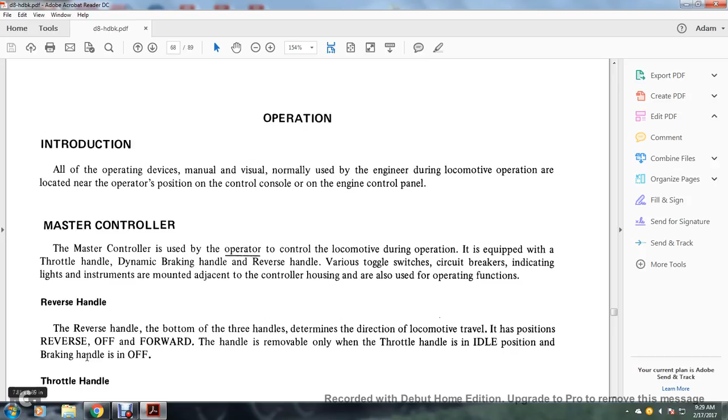The throttle handle is above the reverse handle. It has a shutdown, idle, and eight power positions or notches for full power. Shutdown position is located to the right of idle.

It's used in emergency to shut down all power on multiple unit consists, at the operating position of the control unit. Pull out axially on the throttle handle to put it in shutdown. This action shuts down the diesel engine.

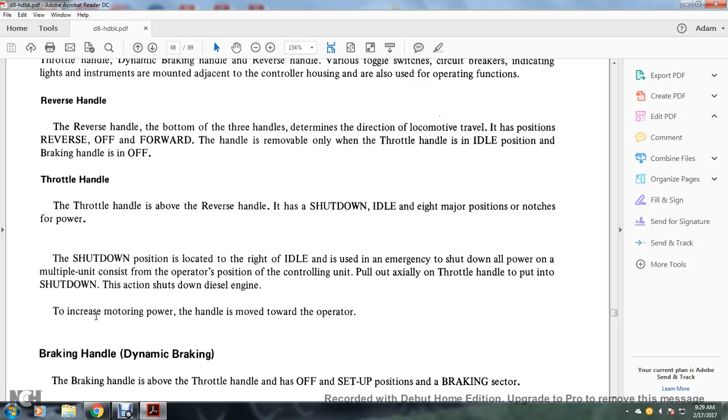To increase the motor power, the handle is moved toward the operator.

The brake handle, dynamic braking. The brake handle is above the throttle handle and has an off position, a setup position, and a braking sector. The off position, nearest the operator, deactivates dynamic braking and shuts it off. The setup position establishes the dynamic braking circuits. Movement beyond setup into the braking sector, away from the operator, increases the brake effort.

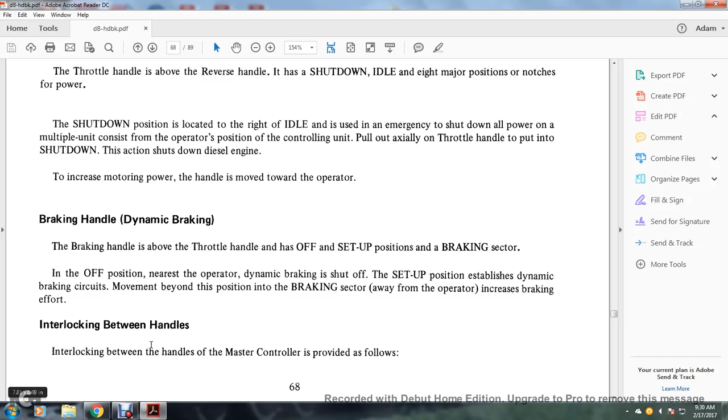Interlocking between handles. Interlocking between the handles in the master controller is provided as follows: 1. The reverse handle must be inserted before the throttle handle can be moved out of idle position for power or emergency shutdown.

2. The reverse handle can be moved to forward or reverse only with the throttle handle in idle position and the brake handle in the off position. 3. The reverse handle cannot be moved out of forward or reverse position when either the throttle handle is advanced beyond idle or the braking handle is advanced beyond off.

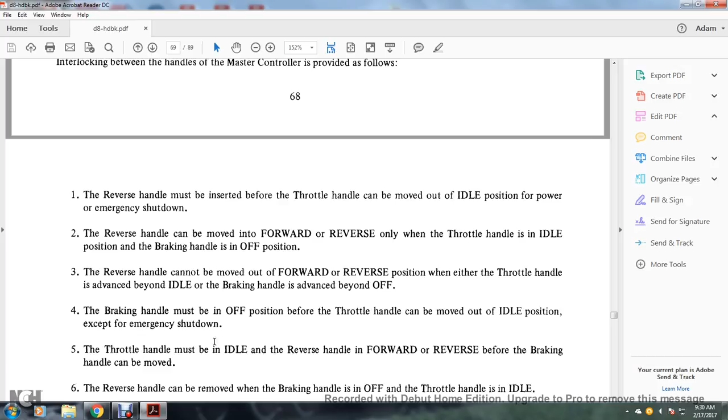The brake handle must be in the off position before the throttle handle can be moved out of idle position, except for emergency shutdown. The throttle handle must be in idle and the reverse handle in forward or reverse before the braking handle can be moved. The reverse handle can be removed when the brake handle is off and the throttle handle is in idle.

Operation. To manipulate the controller handles during locomotive operation, proceed as follows: For lead or single unit operation, handle setup: reverse handle removed, braking handle in off, and throttle handle in idle.

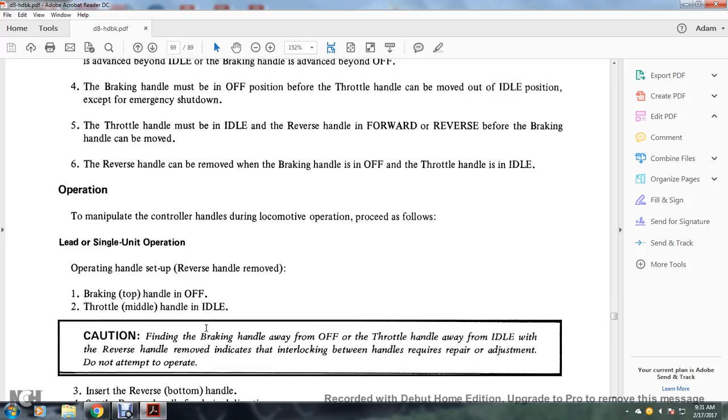Caution: if the brake handle moves away from off, or the throttle handle away from idle, while the reverse handle is removed, this indicates the interlocking between the handles requires repair or adjustment. Do not attempt to operate.

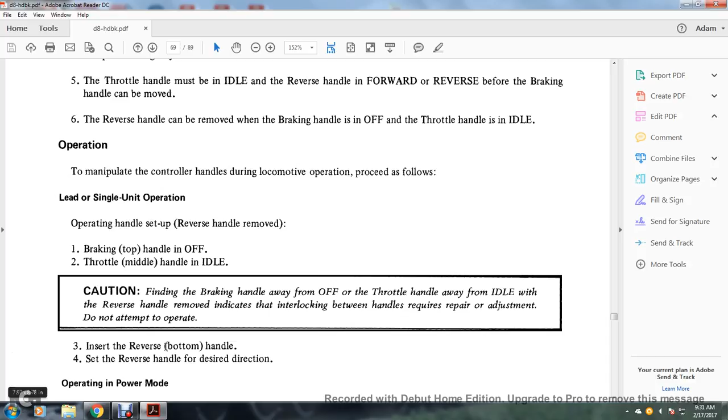3. Insert the reverse handle at the bottom. Set the reverse handle to the desired direction. Operation in power mode.

Braking handle remains off. Move the throttle to the desired notch. Operation in dynamic braking mode.

Throttle handle returned to idle. Move the brake handle to setup. Advance as desired.

Operation as a trailing unit: brake handle is off, throttle is in idle, and reverse handle is centered and removed.

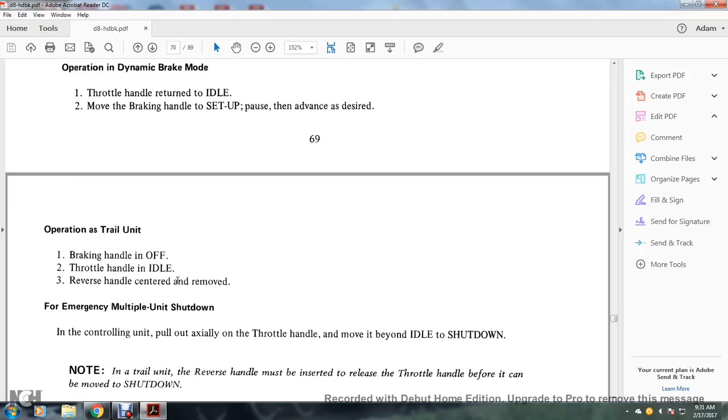For emergency multiple unit shutdown in a control unit, pull out axially on the throttle handle beyond idle to shut down. On a trailing unit, the reverse handle must be inserted to release the throttle handle before it can be moved to shutdown.

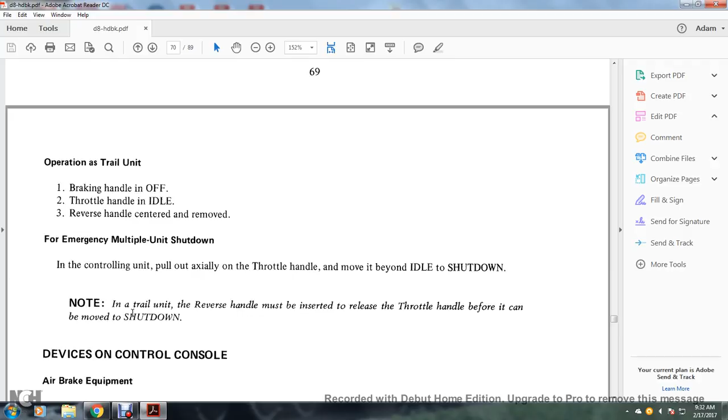Devices in the control console. The air brake equipment. The Schedule 26L equipment arranged, single station multiple unit operation, principal parts are the 26C brake valve. The valve consists of two separate pieces: the automatic brake valve and the independent brake valve.

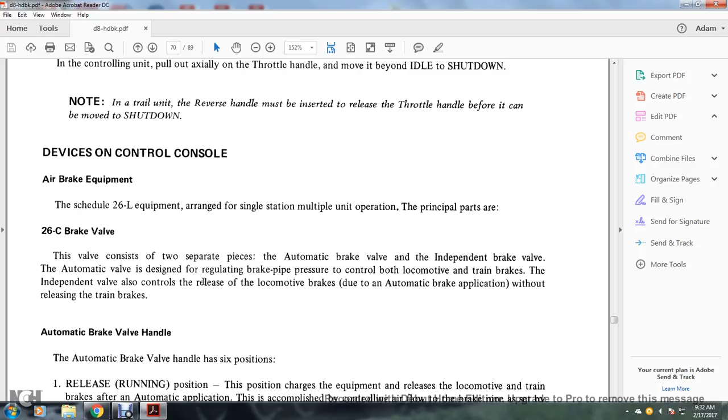The automatic valve is designed for regulating brake pipe pressure to control both the locomotive and train brakes. The independent valve also controls the release of the locomotive brakes due to an automatic brake application without releasing the train brakes. Automatic brake valve handle.

The automatic brake valve handle has six positions: release or running position. The position charges the equipment and releases the locomotive and train brakes after an automatic application.

This is accomplished by airflow through the brake pipe as set by the brake handle position, in conjunction with the regulating valve on the back of the brake stand. The release position is at the extreme left of the quadrant, and it is the normal position when the automatic brake is not in use.

Minimum reduction position. The position is located to the right of the release position, where the brake valve handle reaches the first raised portion of the quadrant. When the brake valve handle is moved to this position, the minimum service application is obtained, resulting in a 4 to 6 pound brake pipe reduction.

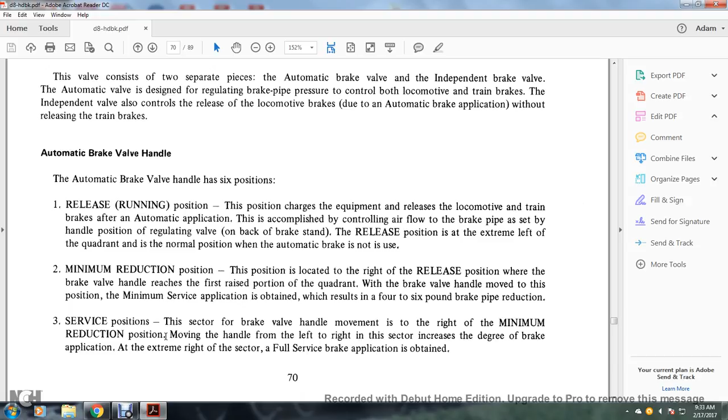Service position. The sector of the brake valve handle movement is to the right of the minimum reduction position. Moving the handle from left to right in this sector increases the degree of brake application. At the extreme right of the sector, a full service brake application is obtained.

Alright, this is your automatic brake valve positions. You have your regulating valve, the brake stand, release automatic handle, minimum reduction, service zone, full service, suppression, handle off, and emergency.

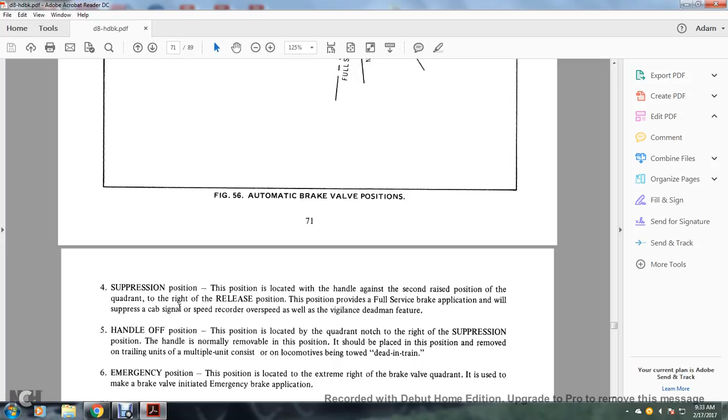This is the suppression position. The position is located with the handle against the second raised position of the quadrant, to the right of the release. This position provides a full service brake application and will suppress the cab signal, speed recorder overspeed, as well as the vigilance deadman feature.

Handle off position. The position is located with the quadrant to the right of the suppression position, and the handle is normally removable. In this position, it should be placed when removed on trailing units and multiple units consisting of locomotives being towed or a dead engine in a train.

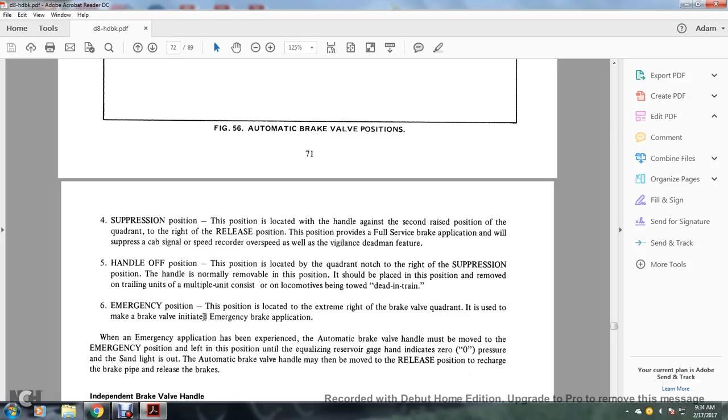Emergency position. The position is located at the extreme right of the brake valve quadrant and is used to initiate an emergency brake application. When an emergency application has been experienced, the automatic brake valve handle must be left in the emergency position until the equalizing reservoir gauge indicates zero pressure.

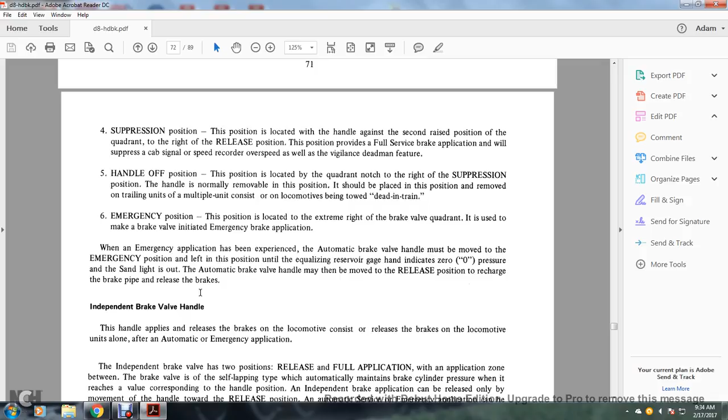Once the reservoir gauge reads zero, the automatic brake valve handle may be moved to the release position to recharge the brake pipe and release the brakes.

Independent brake valve handle. The handle applies and releases the brakes of the locomotive consist, releasing the brakes of the locomotive units alone after an automatic or emergency application. The brake valve has two positions, release and full application, with an application zone between. The brake valve is a self-lapping type that automatically maintains brake cylinder pressure in accordance with the corresponding handle position.

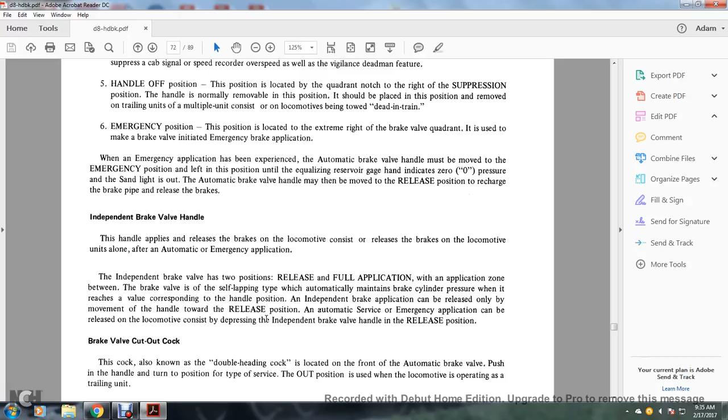The independent brake application can be released by moving the handle toward the release position. The automatic service and emergency application can be released in the locomotive consist by depressing the independent brake valve handle in the release position.

Your brake valve cutout cock. The cock, also known as the double heading cock, is located at the front of the automatic brake valve stand. Pushing in the handle will determine the position and the type of service. The OUT position is used when a locomotive is operating as a trailing unit in a multiple unit cutout cock.

The valve is located on the brake stand and enables a locomotive equipped with 26L brakes to operate with multiple locomotives having other types of brake equipment, by turning to the proper position.

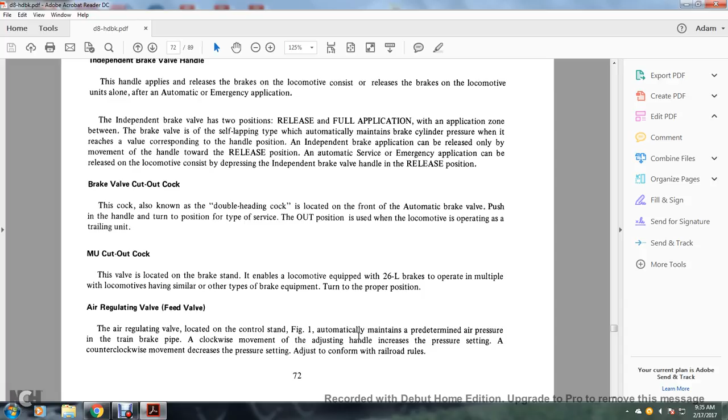Air regulating valve, the feed valve. The air regulating valve, located on the control stand, automatically maintains a predetermined air pressure for the train pipe or brake pipe. Clockwise movement of the adjusting handle increases the pressure setting, and counterclockwise movement decreases the pressure setting, conforming to railroad rules.

The horn valve. Pulling the handle toward you will sound the air horn.

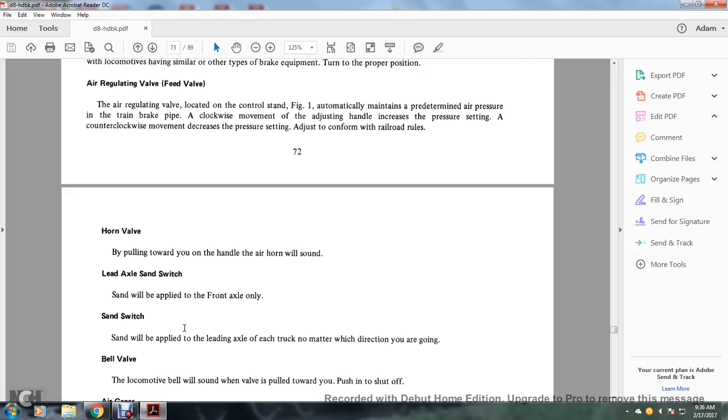Lead axle sand switch. Sand will be applied to the front axle only. The sand switch will be applied to the lead axle of each truck, no matter which direction you are traveling.

Bell valve. The locomotive bell will sound when pulled toward you, and push in to shut off.

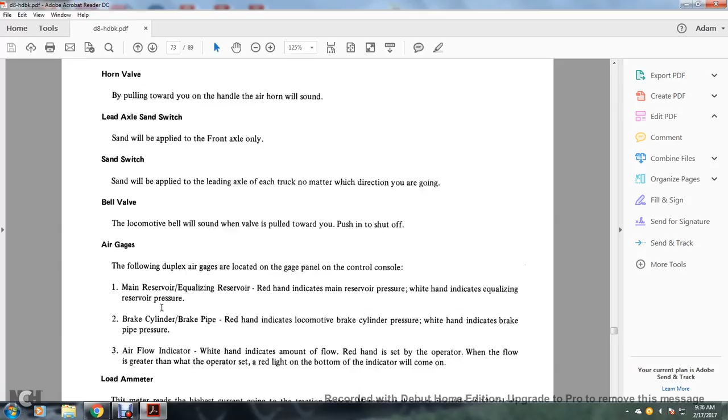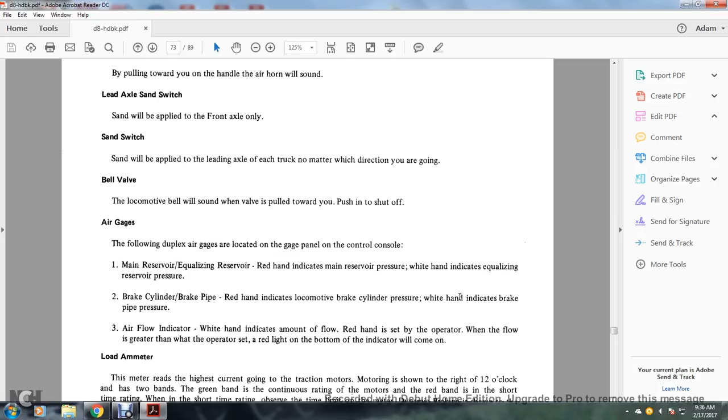Air gauges. The following duplex air gauges are located on the gauge panel of the control console. Main reservoir and equalizing reservoir: the red hand indicates main reservoir pressure, the white hand indicates equalizing reservoir pressure. Brake cylinder and brake pipe: the red hand indicates locomotive brake cylinder pressure, the white hand indicates brake pipe pressure.

Airflow indicator. The white hand indicates the amount of flow, the red hand is set by the operator. When the flow is greater than what the operator has set, the red light button at the bottom of the indicator will come on.

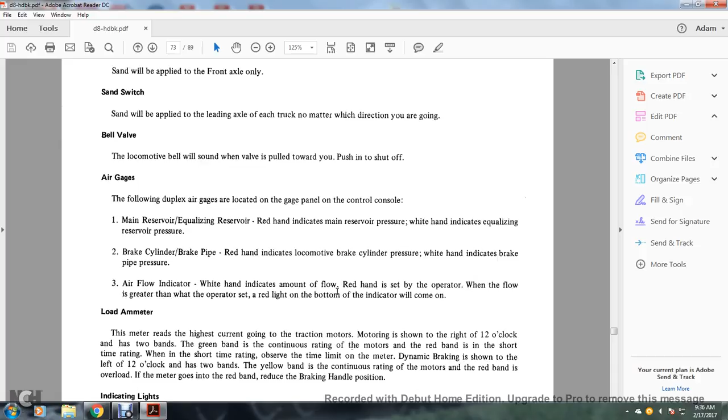The meter reads the highest current going through the traction motor. Motoring is shown to the right of 12 o'clock and has two bands. The green band is the continuous rating of the motor, and the red band is a short time rating. When in the short time rating, observe the time limit of the meter.

The dynamic braking meter is shown to the left of 12 o'clock and has two bands. The yellow band is the continuous rating of the motors, while the red band indicates overload. When the meter goes into the red band, reduce the brake handle position.

Indication lights: there are 6 indication lights on the console, arranged left to right, top to bottom. The wheel slip light indicates that the wheels on some locomotive in the consist are slipping, with a train line indication.

The PCS open light indicates the air brake has gone into the emergency position. All power should be removed from the locomotive.

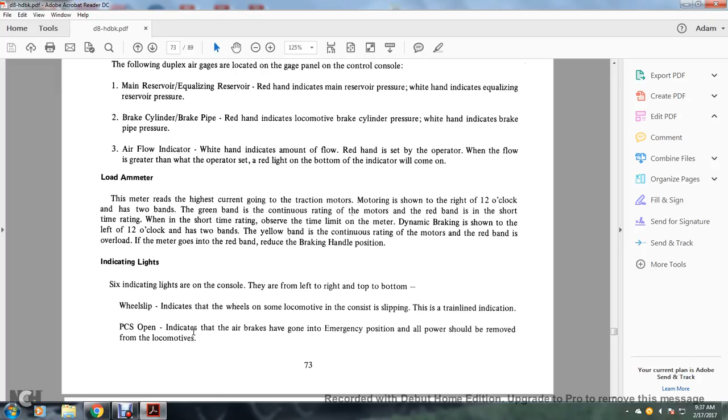The switches gauge light switch turns all lights on the operating console on. The gauge light's dimmer knob is located around the front of the console near the front window.

The step light switch turns on all four corners' step lights.

The generator field circuit breaker is in and on whenever the locomotive is powered and operating as the lead unit. The breaker may also be used to keep the main generator de-energized when it's necessary to run engine speeds higher than idle.

Engine run: the engine run breaker controls the engine speed. It must be on to control engine speed on the lead locomotive. On all other locomotives in the consist, the trail locomotive breaker is in the 'off' position.

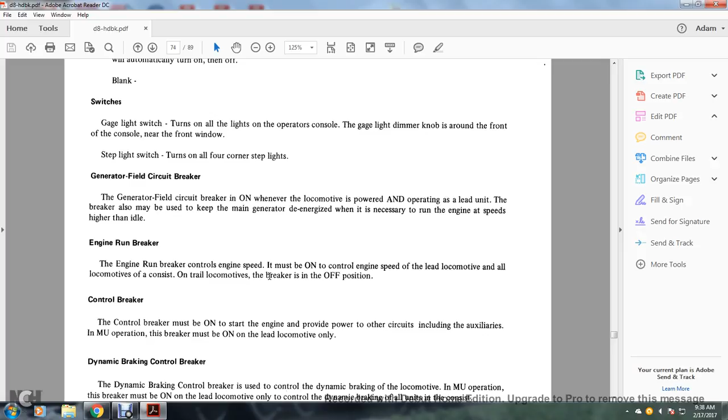Control breaker: the control breaker must be on for starting the engine, and provides power to circuits including the auxiliary multiple unit operation. For multiple unit operation, the breaker must be on at the lead locomotive only.

Dynamic braking control breaker: this breaker is used to control the dynamic brake for the locomotive. For multiple unit operation, the breaker must be on at the lead locomotive only, to control the dynamic braking of all units in the consist.

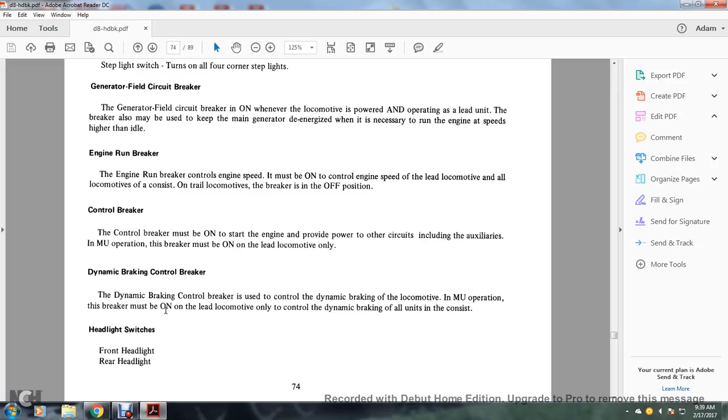Headlight switches: front headlight, rear headlight, call button. The button rings the call bell. All units in the consist follow the normal correlation between the throttle handle, brake handle, and engine speed in RPMs.

At throttle idle, engine notch 1, the engine runs at idle with readings of 445, 445, 453 RPMs. At throttle handle 2, engine notch 2: 521, 549. At throttle handle 3, engine notch 4: 704, 712. At throttle handle 4, engine notch 5: 758, 788.

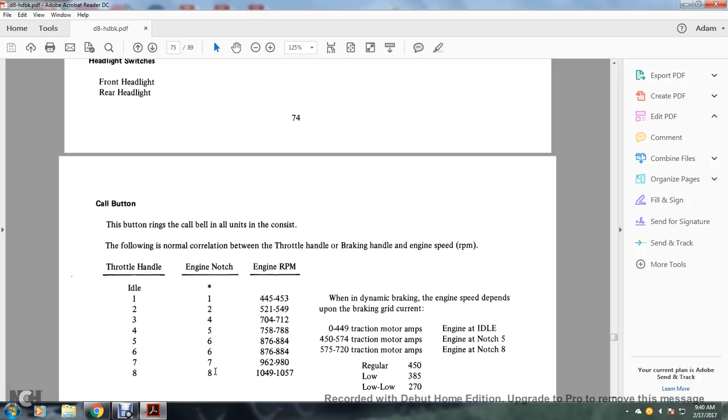At throttle handle 5, engine notch 6: 876, 884. At throttle handle 6, engine notch 6: 878, 876, 884. At throttle handle 7, engine notch 7: 962, 980. At throttle handle 8, engine notch 8: 1049, 1057.

When dynamic braking, the engine speed depends upon the braking grid current. From 0 to 449 traction motor amps, the engine is at idle. From 450 to 574 traction motor amps, the engine is at notch number 5.

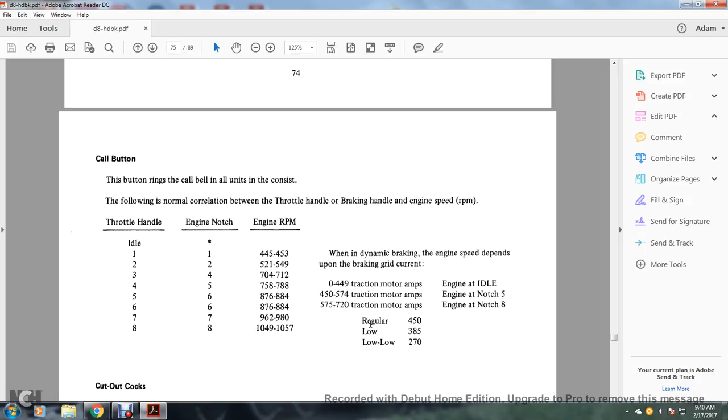From 575 to 720 traction motor amps, the engine is at notch number 8, with regular 450, low 385, low-low 270.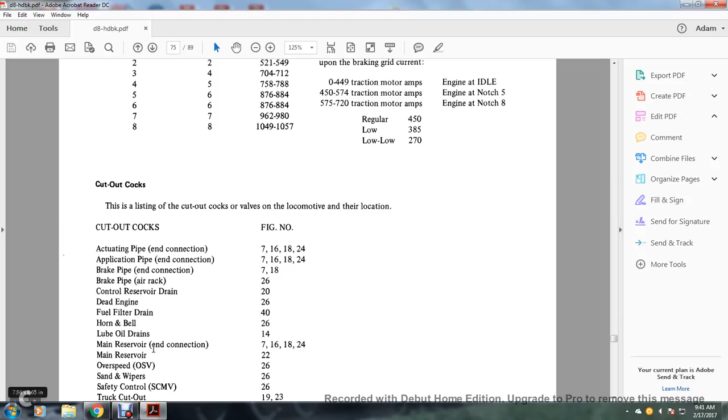Brake pipe end connection: 7 and 18. Brake pipe air rack: 26. Control reservoir drain: 20. Dead engine: 26. Fuel filter drain: 40. Horn and bell: 26. Lube oil drains: 14. Main reservoir end connection: 7, 16, 18, 24. Main reservoir: 22. Overspeed, sand and wipers, and safety control: 26. Truck cutout: 19, 23. Water drain: 42. Water sight glass shutoff: 42.

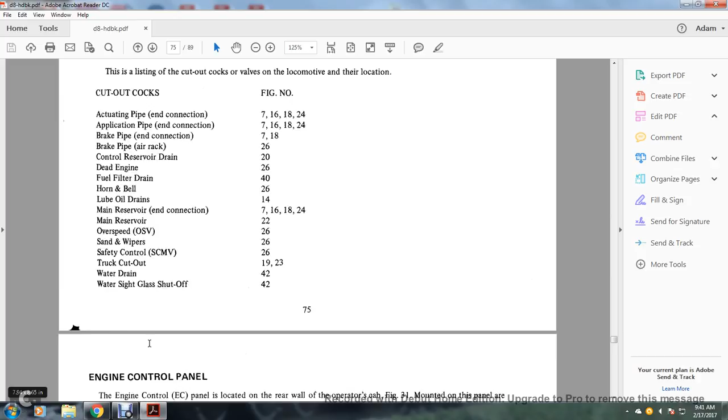The engine control panel is located on the rear wall of the operator's cab. As shown in figure 31, mounted on the panel are various circuit breakers, switches, a display panel, and other operating devices used during locomotive operation. A description of each of these devices will follow.

Circuit breakers for the engine control panel: the top row of circuit breakers is used for optional equipment. This equipment can be turned off when the unit is operating as a trail unit. From left to right, the circuit breakers correspond to their function.

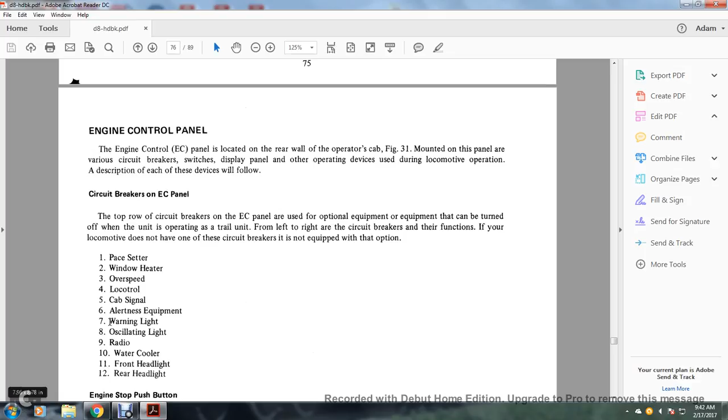If the locomotive does not have one of these circuit breakers, it is not equipped with that option: 1 pacesetter, 2 window heater, 3 overspeed, 4 Locotrol, 5 cab signal, 6 alertness equipment, 7 warning light, 8 oscillating light, 9 radio, 10 water cooler, 11 front headlight, 12 rear headlight.

Engine stop push button: the button shuts down the diesel engine of that unit only.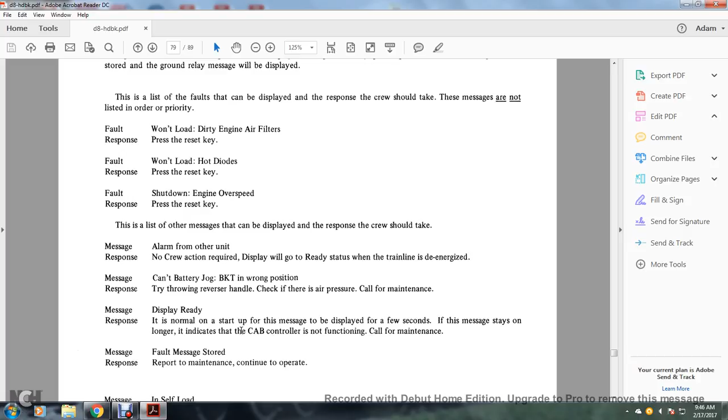Message display ready: as in normal startup, the message displays for a few seconds. If the message stays on longer, it indicates the cab controller is not functioning, call for maintenance. Message fault, message stored: report to maintenance and continue operation.

Message: if self-loaded, check to see if the self-load switch in the electrical locker in the operators cab is at the normal position. Message isolated: place the engine control panel switch in the running position.

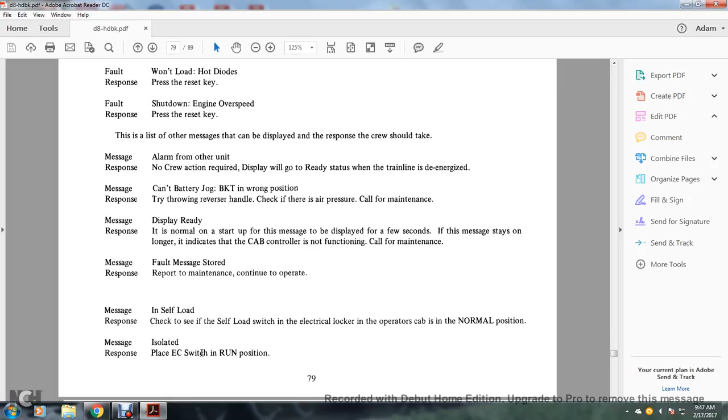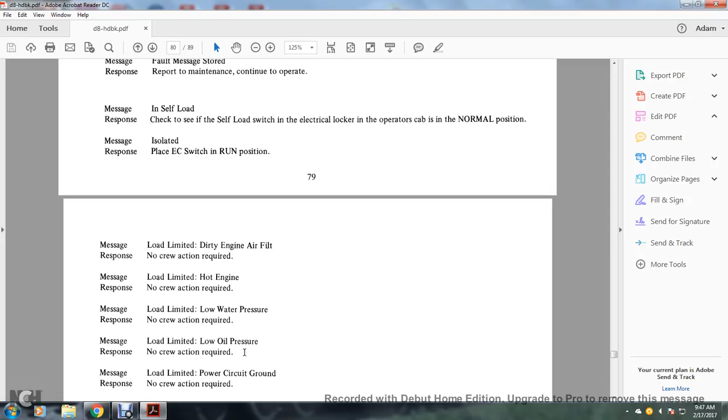Load limit, dirty engine air filter: no crew action. Load limited, hot engine: no crew action. Load limited, low water pressure: no crew action. Load limited, low oil pressure: no crew action. Load limited, power circuit ground: no crew action. Load limited, electrical control problem: no crew action required.

Load limit, hot traction motor: no action required. Message: load limit, PLS in notch 7. Check the position of the notch 7 switch. The switch should only be used for the lead unit when the throttle handle is in the 8 notch.

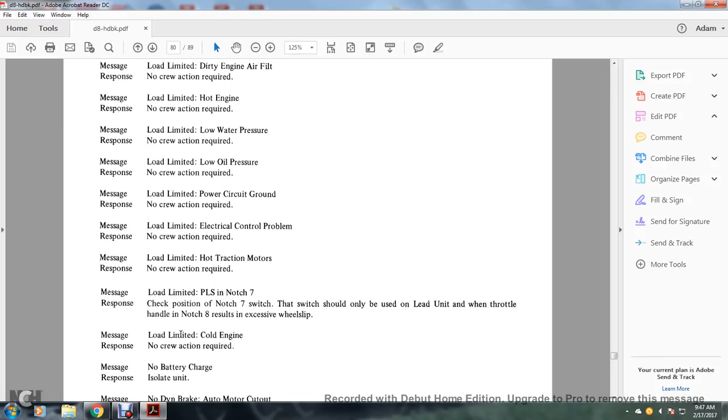Excessive wheel slip. Message: load limited, cold engine: no crew action. No battery charge, isolated unit: no dynamic braking, auto motor cut out: no action required. Normally the motor is automatically cut out by the controls.

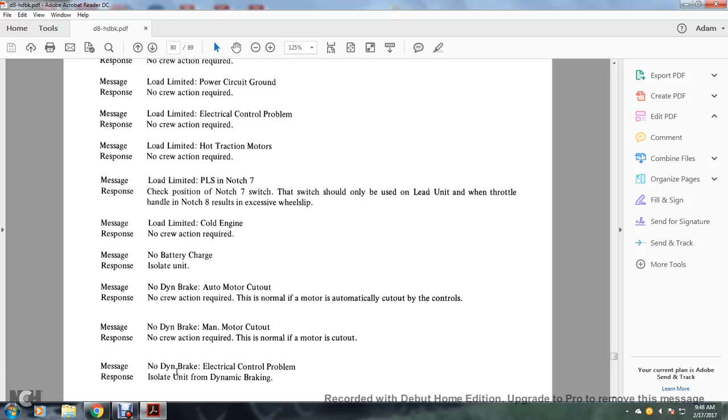No dynamic braking, manual motor cut out: no crew action required, normal if the motor is cut out. No dynamic braking, electrical control problem: isolate the unit. Dynamic brake provides standby power: call maintenance.

Rad fan problem: may reduce load, no crew action. Ready: no crew action. After 30 minutes with no activity, the display will go blank. If you wish to turn on the display, simply touch any key.

Shut down, low water pressure: check the water level, full and temperature is below 45 degrees. Follow the railroad rules for draining the unit.

Shut down, low oil pressure: check the oil level, isolate the unit. Prepare to drain water if necessary.

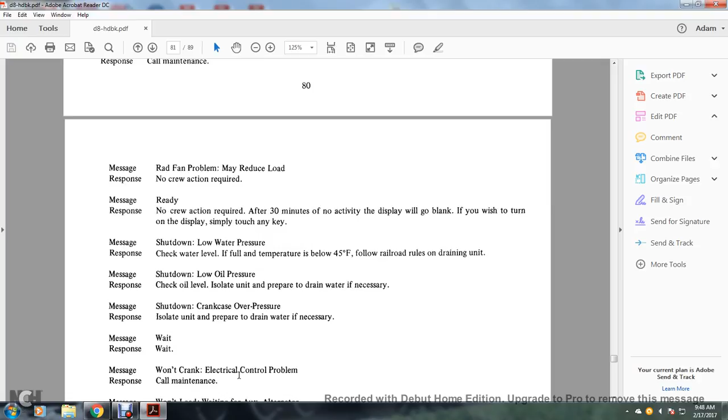Shut down, crank case overpressure: isolate unit and prepare to drain the water if necessary.

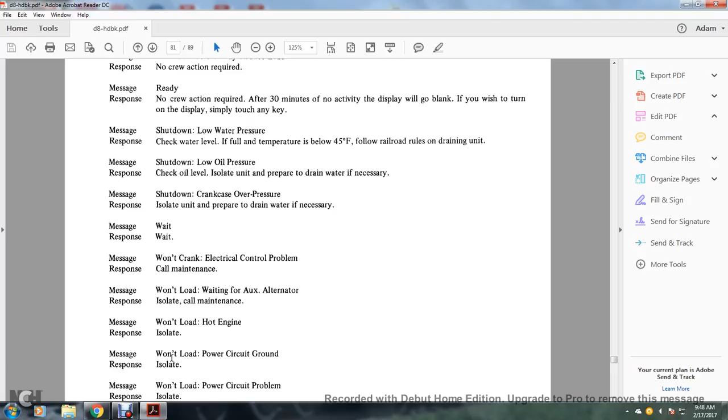Message wait: response wait. Message won't crank, electrical control problem: call maintenance. Won't load, waiting for aux. alternator, isolate: call maintenance. Won't load, hot engine: isolate. Won't load, power circuit ground: isolate. Won't load, power circuit problem: isolate. Won't load, electrical control problem: isolate.

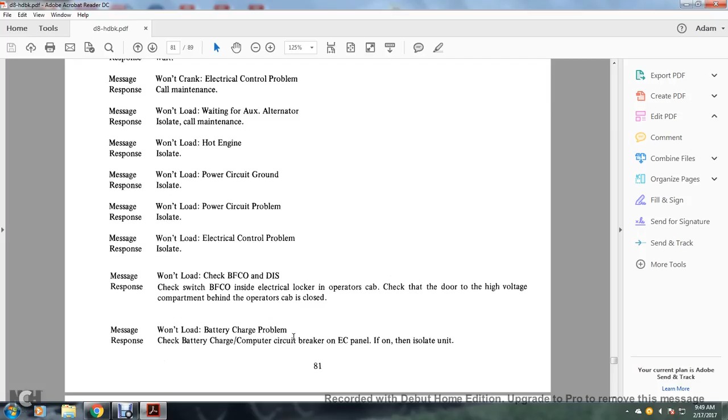Message won't load: check BFCO and DIS, check the BFCO inside the electrical locker in operator's cab. Check the door for the high voltage compartment behind the operator's cab is closed.

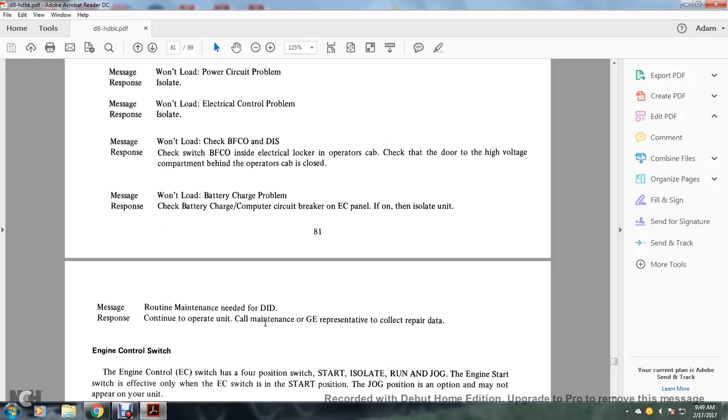Message won't load, battery charging problem: check battery charger computer circuit breaker on the engine control panel, if on, then isolate the unit. Message routine maintenance due: displayed by the diagnostic display, continue operating, call maintenance or GE representative to collect repair data.

Your engine control switch has 4 positions: start, isolate, run, and jog. The engine start switch is effective only with the electric control engine control switch in the start position. The jog position is an option that may not appear on your unit. When the engine is running and the engine control switch is in the start position.

Engine is held at an idle. Power cannot be applied to the locomotive. The power plant is said to be offline.

The engine is running with the engine control switch in the isolate position. The engine speed is held at idle, power cannot be applied to the locomotive. The alarm bell will sound if a fault occurs that will shut the engine down.

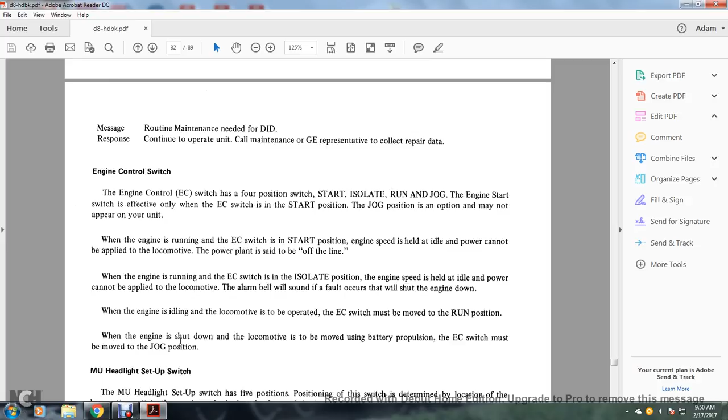Engine is idling. For the locomotive to be operated, the engine control switch must be moved to the run position. When the engine is shut down and the locomotive is moved using battery propulsion, the engine control switch must be moved to the jog position.

Your multiple unit headlight setup switch has 5 positions, determined by the location of the locomotive and whether the front of the locomotive unit is a leading or trail unit. The switch positions are as follows.

Single or middle unit: place the switch in this position for any locomotive operated singly, or for all units except the leading or trailing units, when the locomotive consist is made of more than one unit.

Short hood leading unit: place the switch in this position when the leading unit is operated with the short hood forward. Long hood leading unit: place the switch in this position when the leading unit is operated with the long hood forward.

Short hood trailing unit: place the switch in this position when the final trailing locomotive unit is connected so that its short hood trails. Long hood trailing unit: place the switch in this position when the final trailing unit is connected so that its long hood trails.

The following cutout switches are located in the engine control panel: motor number 1 through 6, and speed sensor, locked axle. Note the speed sensor cutout switch only cuts out when the sensor or any traction motor is cut out. The two motor speed sensors must operate before the unit is allowed to load.

Battery charge receptacle. The battery charge receptacle is located in the engine control panel. The circuit breaker. The following power circuits are located at the bottom of the engine control panel: engine strip heater, helper strip heater, engine main cab heater, helper's main cab heater, air conditioner optional.

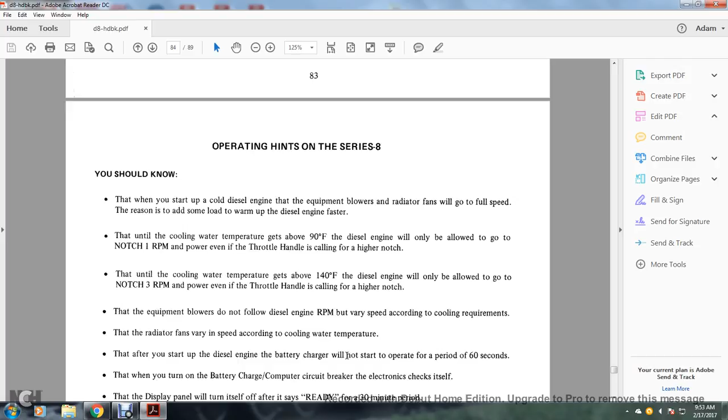After you start up the diesel engine, the battery charger will not start to operate for a period of 60 seconds. When you turn on the battery charger computer circuit breaker, the electronics check itself. The display panel will turn itself off after it says ready, for a 30-minute period.

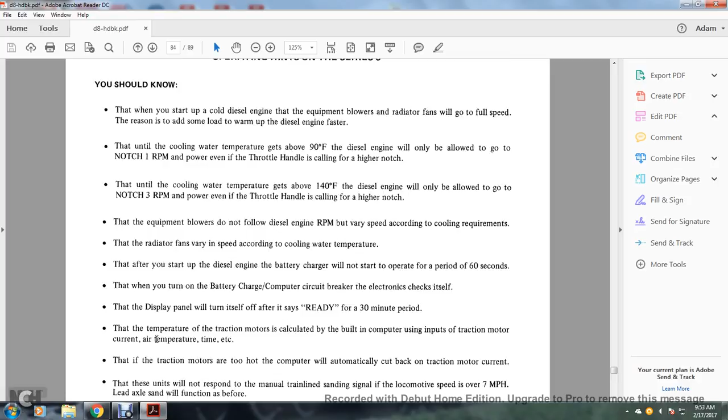The traction motor temperature, calculated by the built-in computer, will use the input of traction motor current, air temperature, and time. If the traction motors are too hot, the computer will automatically cut back on the traction motor current.

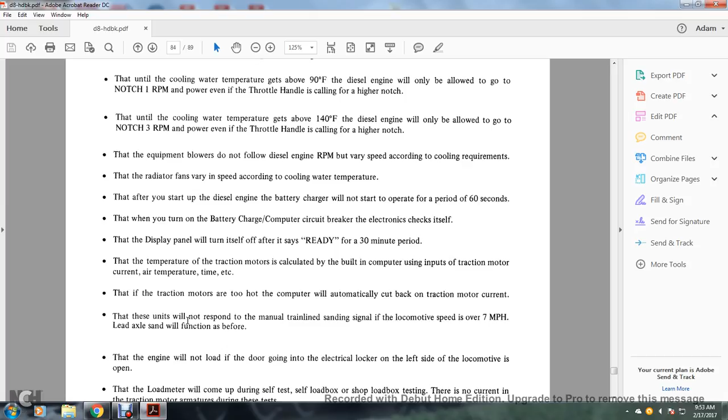The units will not respond to manual trainlined sanding signal if the locomotive speed is over 7 miles per hour. Lead axle sand will function as before.

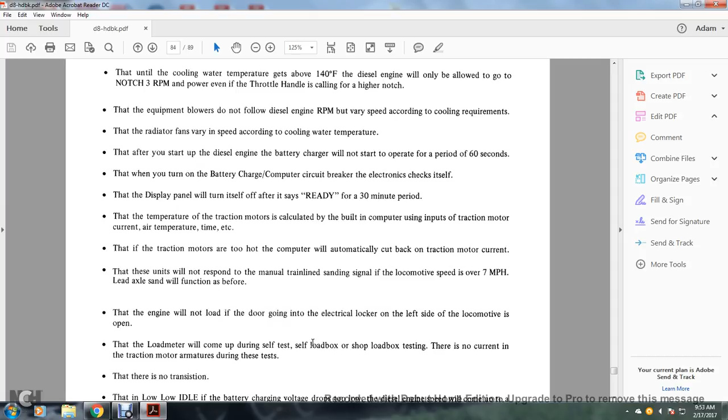The engine will not load if the door to the electrical locker on the left side of the locomotive is open. The load meter will come up during self test, self load box or shop load box testing. There's no current in the traction motor armatures during this test.

There is no transition. In low low idle, if the battery charging voltage drops too low, the diesel engine speed will come up to a higher idle while the battery charging demand is on.

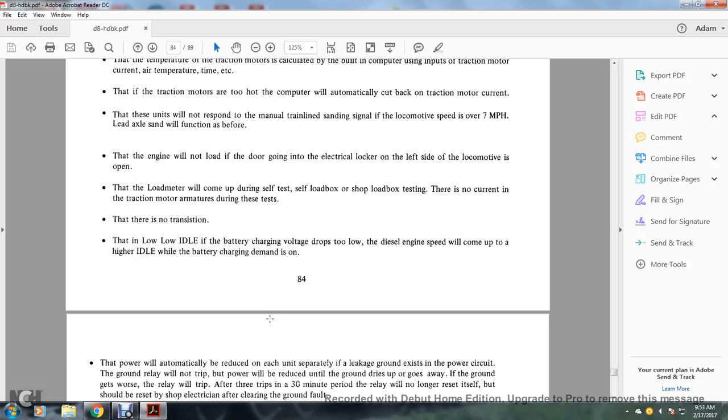The power automatically reduces on each unit separately if a leakage ground exists with the power circuit, but the ground relay will not trip. The power will reduce on the unit with the ground until it dries up and goes away. If the ground is wet enough, the relay will trip.

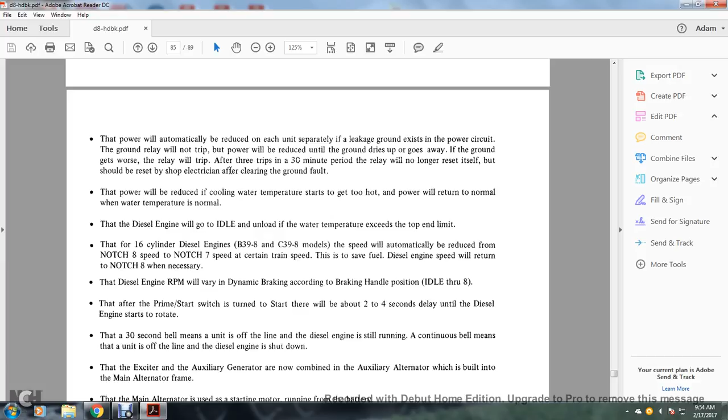After 3 trips in a 30-minute period, the relay will no longer reset itself and should be reset by the shop electrician after clearing the ground fault.

The power will reduce when the cooling water temperature starts to get too hot, and will return to normal when the water temperature is normal. The diesel engine will go to idle, unloaded, if the water temperature exceeds the top end limit.

On the 16-cylinder diesel engine B39-8 and C39-8, engine speed will automatically reduce from notch 8 to notch 7 at certain train speeds to save fuel. Diesel engine speed will return to notch 8 when necessary.

Diesel engine RPM will vary with dynamic braking according to the braking handle position, idle through 8.

After the prime start switch is turned, there will be about a 2 to 4 second delay before the diesel engine starts to rotate. A 30-second bell means the unit is offline but the diesel engine is still running. A continuous bell means the unit is offline and the diesel engine is shut down.

The exciter and auxiliary generator are now combined with the auxiliary alternator built into the main alternator frame, which is used for starting motor running off the battery. Each of the rectifier over-temperature switches has its own separate input to the computer.

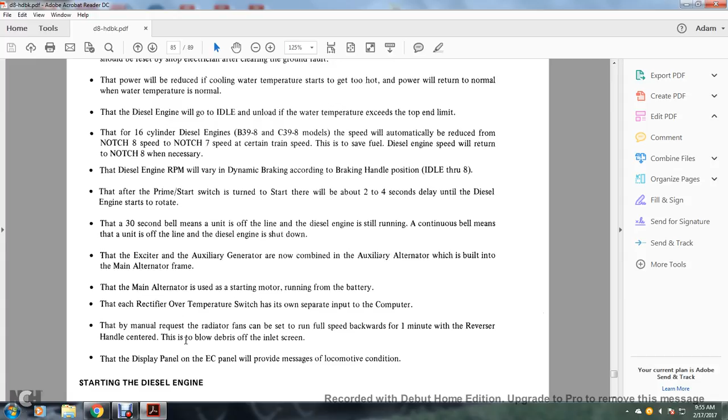On the computer, the manual request for the radiator fans can be set to run full speed backwards for one minute, with the reverser handle centered, to clear debris off the inlet screen. The display panel of the engine control panel will provide messages on locomotive condition.

Starting the diesel engine. Note: if the engine has been shut down for a considerable period of time, the cylinders should be cleared of fuel or water accumulation before starting. Proceed as follows: apply the engine barring-over device, and back off the compression relief plugs on the left side of each cylinder.

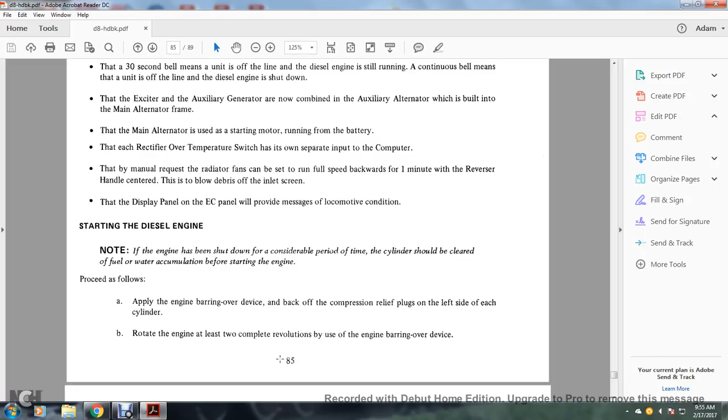Rotate the engine at least two complete revolutions using the engine barring-over device. Remove the barring-over device from the engine. Tighten all the compression relief plugs before cranking. Note: the barring-over feature cover must be securely mounted, otherwise the engine cannot be cranked.

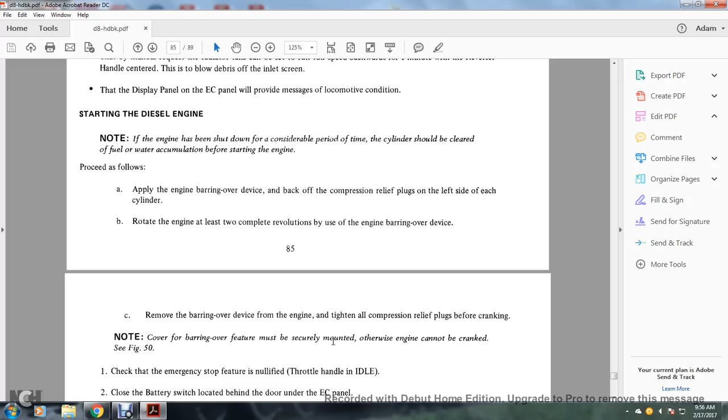See figure 50. 1. Check that the emergency stop feature is nullified, or throttle is in the idle position, with the throttle handle in idle. Close the battery switch located behind the door under the engine control panel.

Turn all circuit breakers on the bottom row of the engine control breaker panel. Turn on whichever circuit breakers on the top row are needed. Check the diagnostic display for any fault messages; it should read ready. Place the engine control switch into the start position.

Go to the start station located at the engine and put the start switch in the prime position. Hold until you see fuel in the sight glass. Turn the switch to the start position and hold until the engine starts.

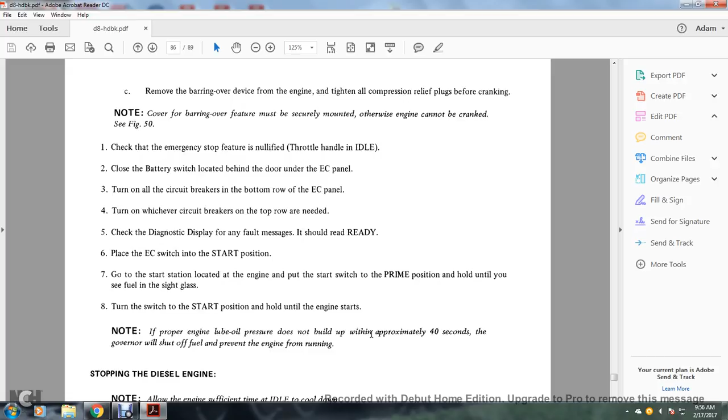Note: if proper lube oil pressure does not build up within approximately 40 seconds, the governor will shut off the fuel and prevent the engine from running.

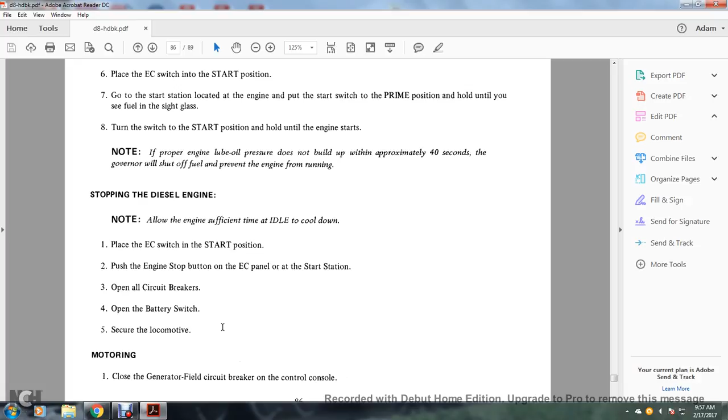Stopping the diesel engine. Note: allow the engine sufficient time to idle and cool down. Place the engine control switch in the start position, then press the engine stop button on the engine control panel or at the start station. Open all circuit breakers, open the battery switch, and secure the locomotive.

Motoring: close the generator field circuit breaker on the control console. Caution: to prevent equipment damage when changing from dynamic brake to power, ensure the throttle handle is in idle and the dynamic braking handle is in the off position.

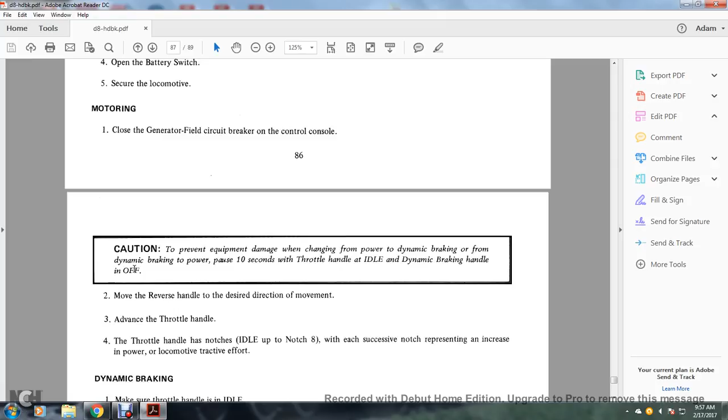Move the reverse handle to the desired direction of movement. Advance the throttle handle through the notches from idle up to notch 8, with each successive notch representing an increase in locomotive tractive effort.

Dynamic braking: make sure the throttle handle is in the idle position, then advance the brake handle as desired.

Reverse locomotive: bring the locomotive to a full stop, move the reverse handle to the opposite direction, release the brake handle, and advance the throttle.

Operating as the lead unit: test the air brakes in accordance with railroad rules. Close the generator field, dynamic braking control, and engine run circuit breakers on the operator's console.

Place the multiple unit headlight switch in the proper position. Move the reverse handle in the desired direction. Operate the locomotive in accordance with railroad operating procedure.

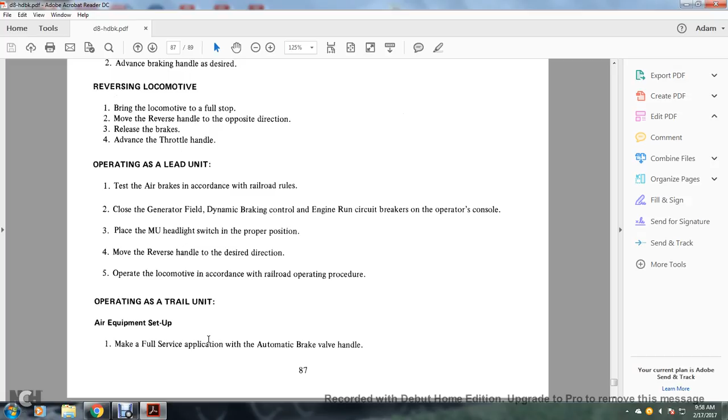Operating as a trail unit: for air equipment setup with multiple units, make a full service application with the automatic brake valve handle. Move the brake valve cutout double-heading cock into the out position. Move the automatic brake valve handle to the off position.

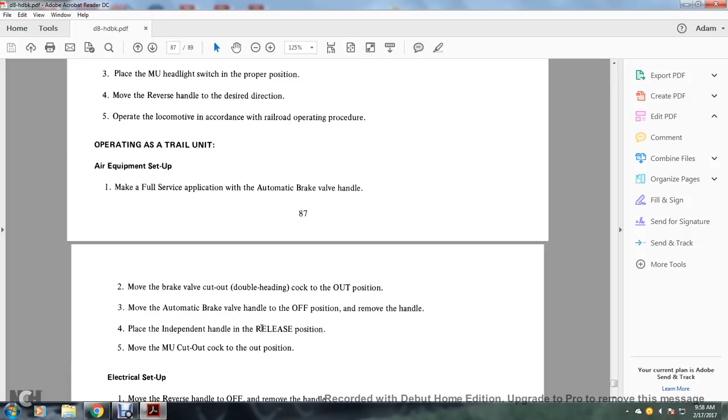Remove the handle, then place the independent handle in the release position, and set the multiple unit cutout cock to the out position.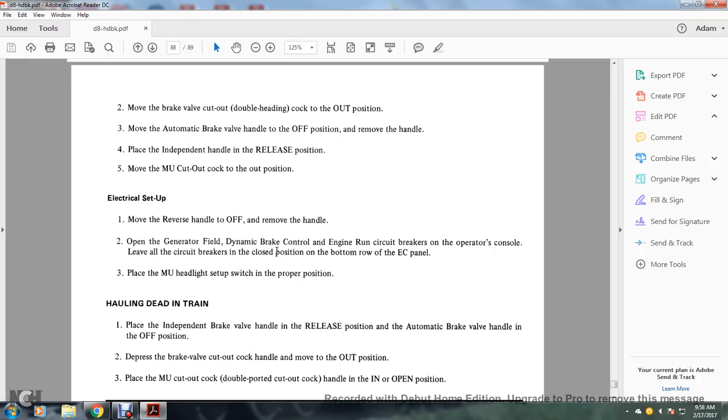For the electrical setup: move the reverse handle to the off position and remove the handle. Open the generator field, dynamic brake control, and engine run circuit breakers on the operator console, leaving all circuit breakers closed on the bottom row of the engine control panel. Set the multiple unit headlight to the proper position for hauling dead in train, and place the independent brake valve handle in the release position and the automatic brake valve handle in the off position.

Depress the brake valve cutout cock to the out position, then move the multiple unit cutout cock, the double-ported cutout cock handle, to the in or open position.

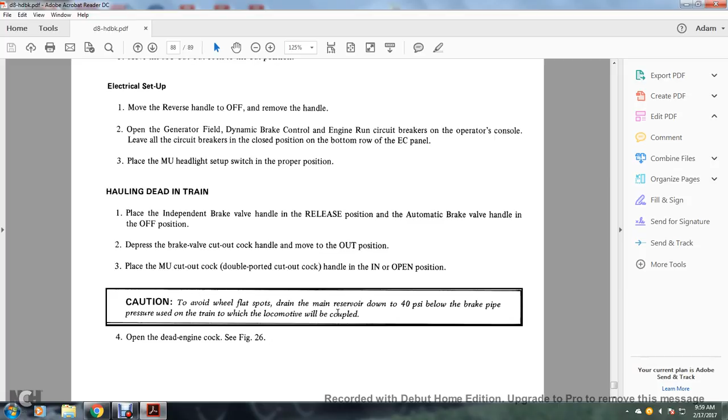Caution: to avoid wheel flat spots, drain the main reservoir down to 40 psi below the brake pipe pressure used on the train to which the locomotive will be coupled. Open the dead engine cock, see figure 26.